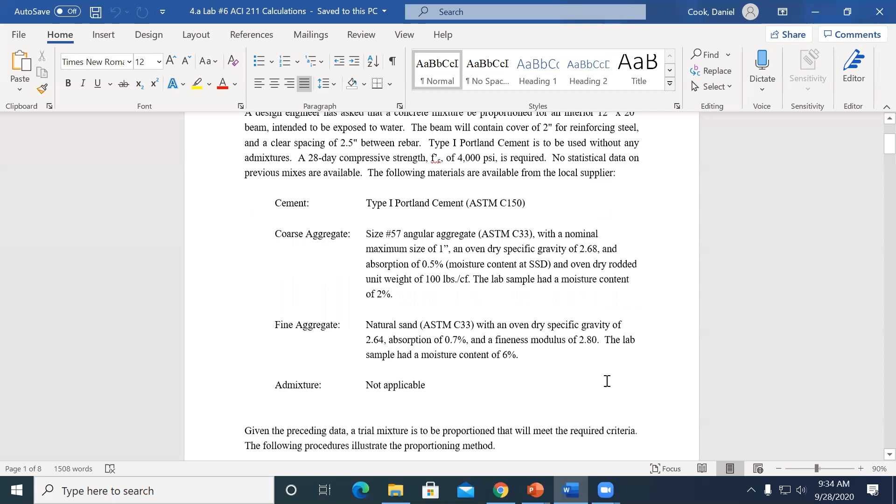Rock and sand, the numbers you got in the lab. So pretty much we're going to take our materials, put them together. I've already shown you, with the coarse aggregate and fine aggregate, we had 3 labs to go over how to figure out gradation, unit weight, specific gravity, and absorption. So now we're just kind of putting some of this stuff together and actually applying it to a mix design.

So this is what was previously in the lab manual. I think I changed up some of the words because they were very, very outdated, but I think the example's fairly relevant.

There's a 4,000 PSI mix, and they have some information about the rebar spacing, 2-inch rebar spacing for the cover. It's supposed to be an interior beam that's 12 inches by 20 inches - so that's the cross section, not the length. So 12 inches in depth by 20 inches in the actual width.

It doesn't matter necessarily how long it is for a mix design. It's just more about understanding the cover around that - if you've never seen what cover is, I'll just put it on the board real quick.

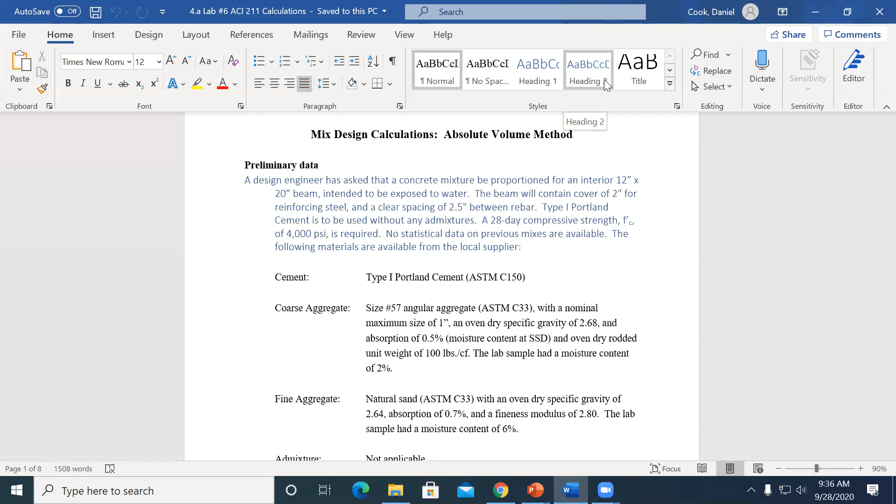Maybe I'll design this next time. But the spacing between these rebar maybe 2.5 inches, but the actual cover around is 2 inches. So that's kind of what they're trying to communicate - when you pour concrete, maybe you're pouring it straight down, your forms are around, the concrete has to get in through the rebar. So you can't have too large of a rock size for your coarse aggregate, or you're going to have problems pouring it in there.

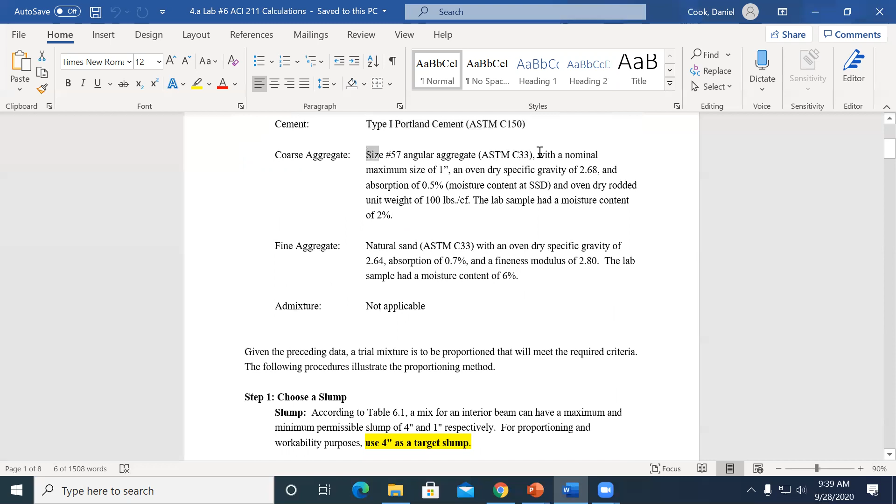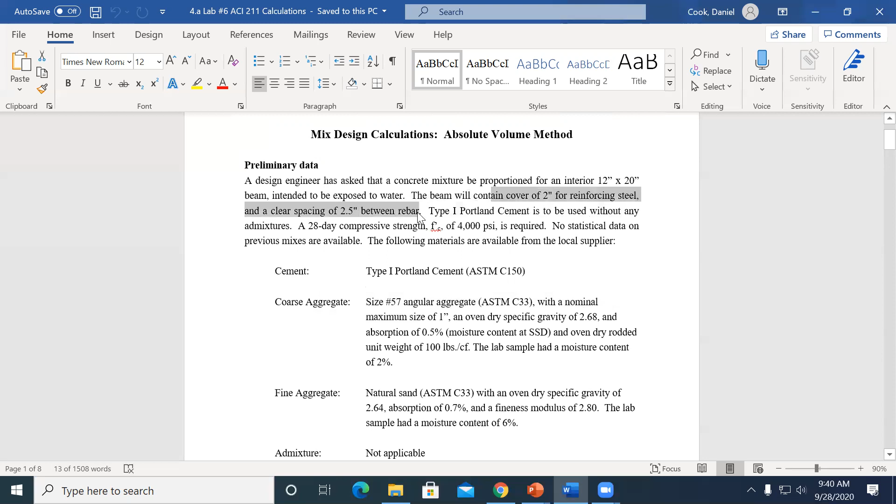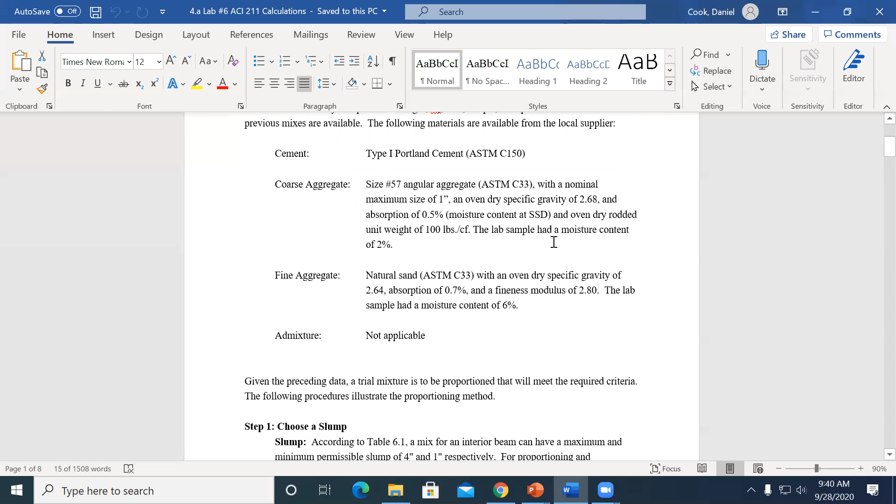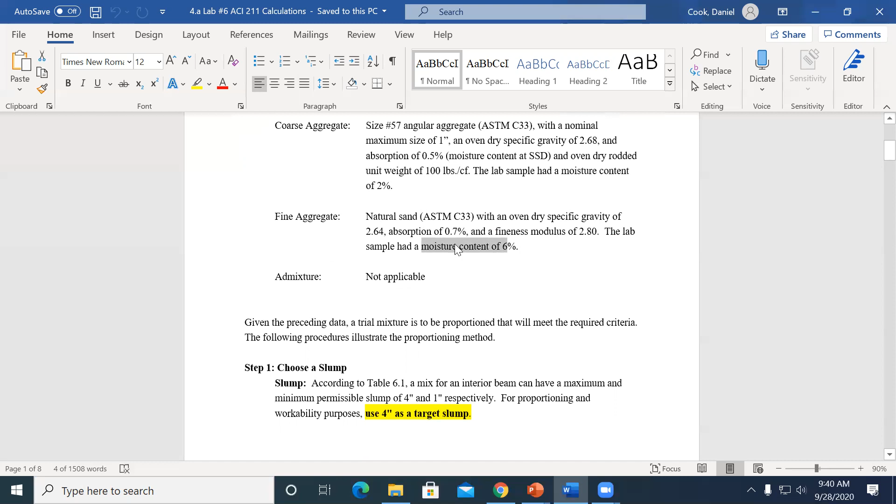We're going to use a 1-inch nominal maximum size, and we'll just check it to make sure that it fits within the cover of that steel reinforcement and that spacing. And then we have the information for our coarse aggregate and our fine aggregate - specific gravities, absorptions, the unit weight, and then how much moisture, how much water's contained. So that's for the rock, that's for the sand.

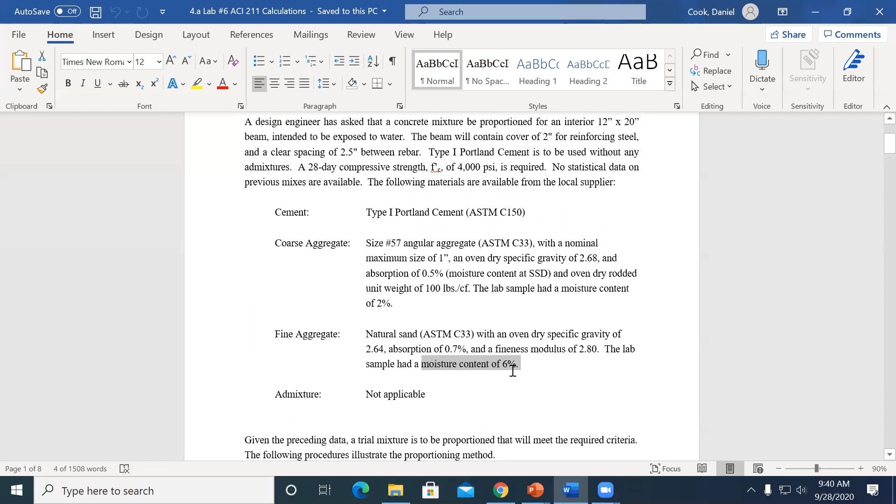Admixtures - we're not using fly ash. ACI 211 doesn't technically have that. I'm going to go through how to modify a mix design or how to incorporate those things in a mix design here - that's next lecture, I should say. So in a couple days, we'll go over how to do that part.

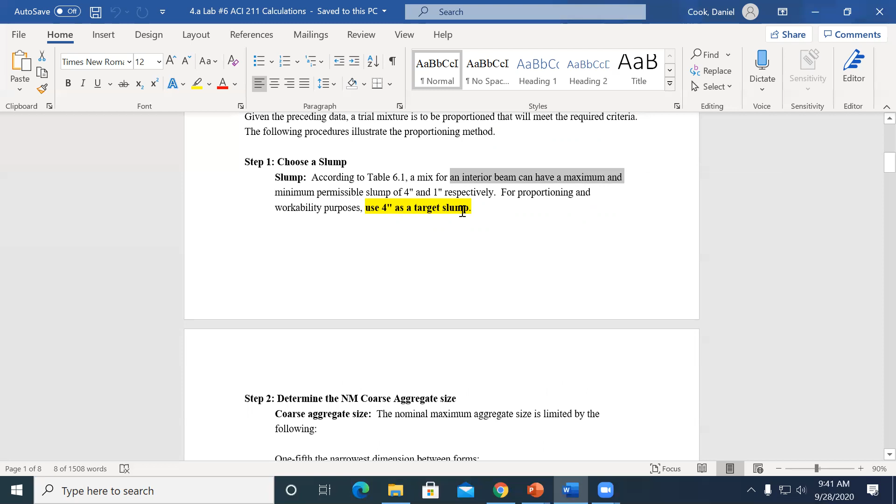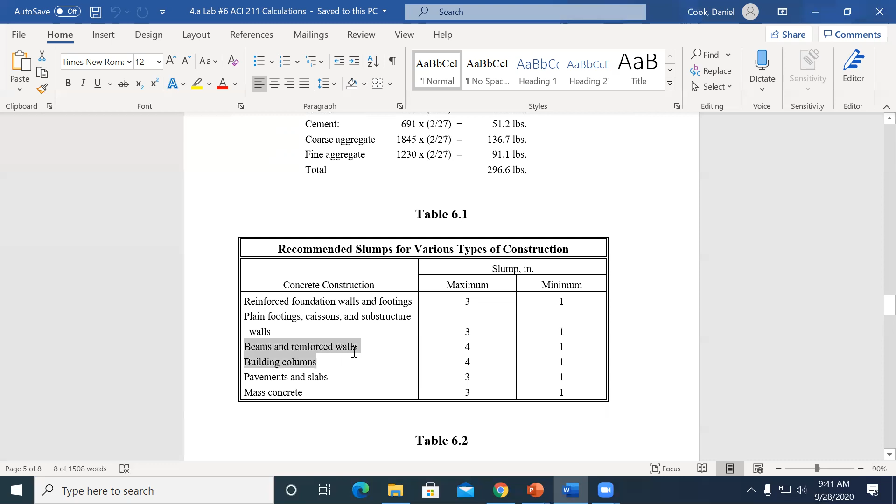So let's go through the basic steps. You're going to choose a slump. For an interior beam, they chose a 4-inch slump, and they got that from table 6.1. There's a maximum slump and a minimum slump recommended by ACI 211 - published in 1991. So you can go and look at an actual beam. I think they probably used a beam and a wall, said maximum of 4 inches.

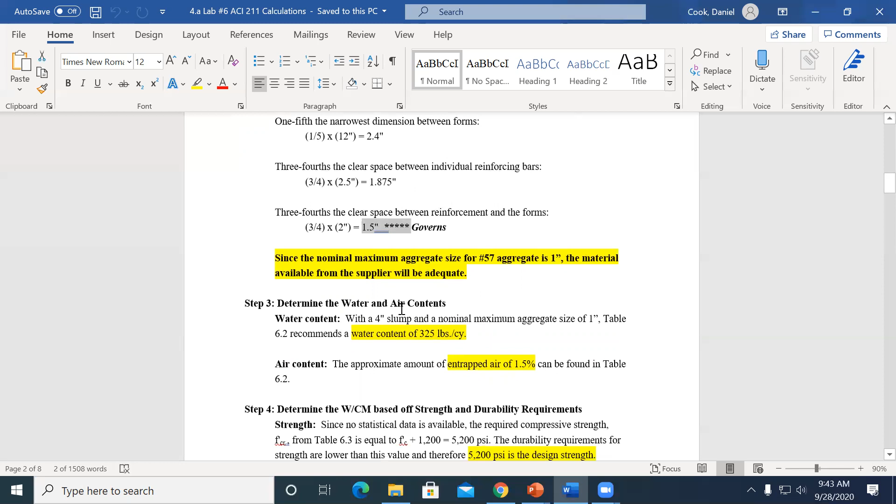So you find the smallest one out of all 3, and the 1.5 governs. Since the nominal maximum size of the aggregate for number 57 is 1 inch, that'll be just fine for what we're doing. If we're using a larger aggregate size, larger than 1.5, we'd have a problem. If it was at 1.5, we'd still be fine. So 57 or 67 stone will work just fine.

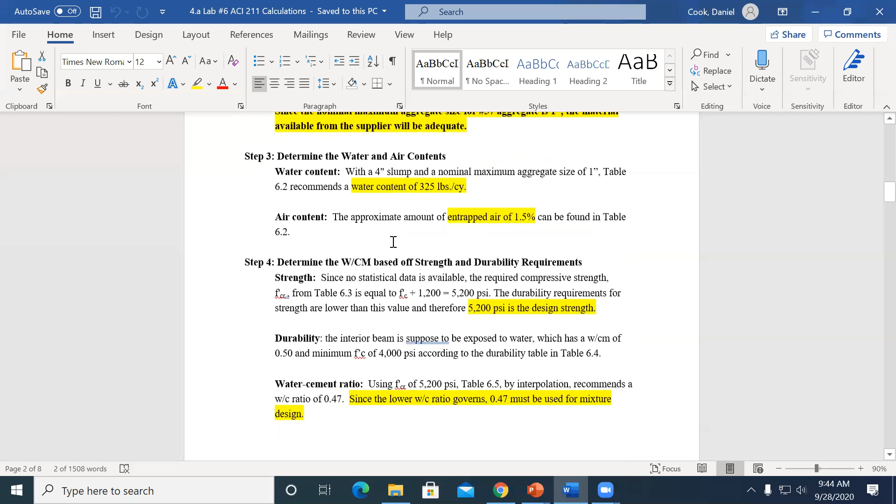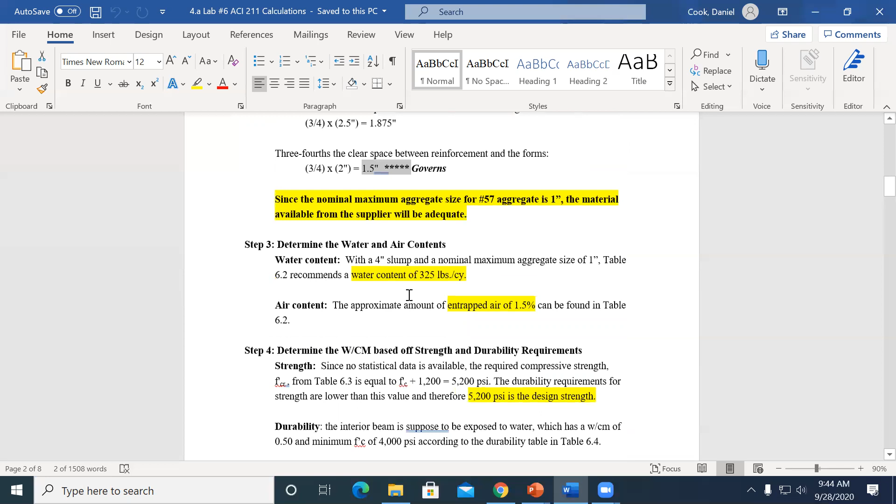Step number 3, you're going to determine the water content and air content. They don't give us air content or anything. This is for an interior beam, not exterior. Interior, you don't have to have air entrainment. Exterior, where it's exposed to freeze-thaw, you're going to have air entrainment. So they went to 6.2 to determine water and air.

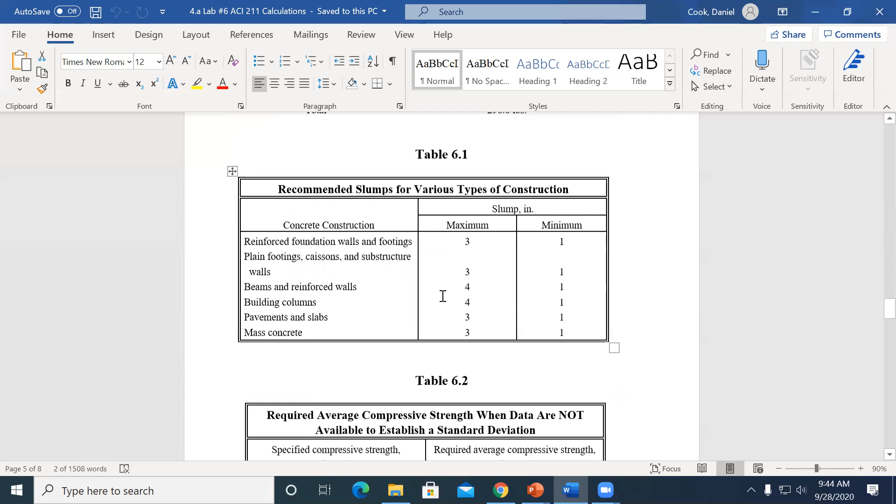So 6.2, this is for strength. There it is, so 6.4. You know, I need to move these around -- I know I moved them around once already, we need to move them around again.

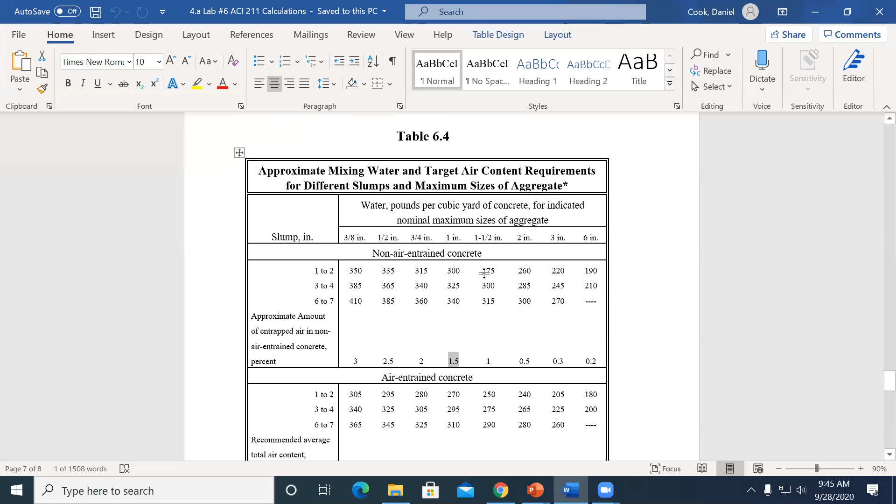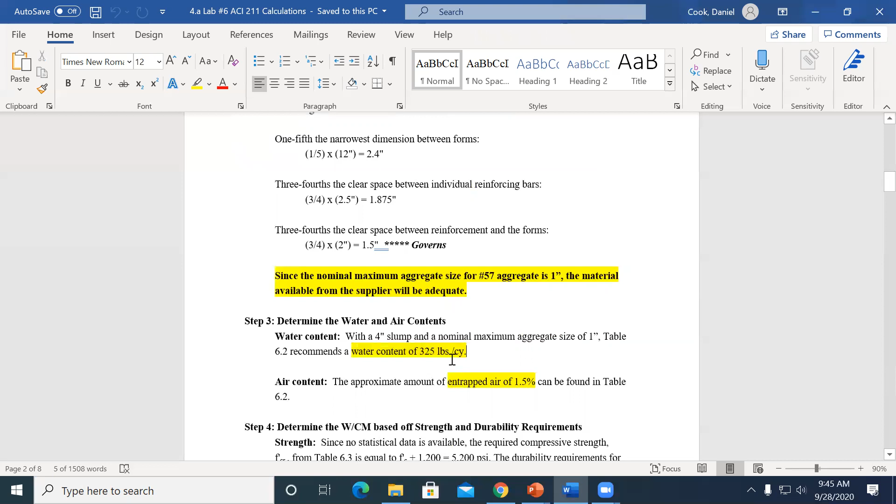So they went through and said a 4-inch slump. Here's how much water for a non-air entrained mix: 1-inch nominal maximum size, roughly a 4-inch slump, you need 325 pounds. And for air content, if it's non-air entrained, according to ACI 211 for this table, it would be 1.5% air. That's exactly what they got here: 325 pounds and 1.5 for the air.

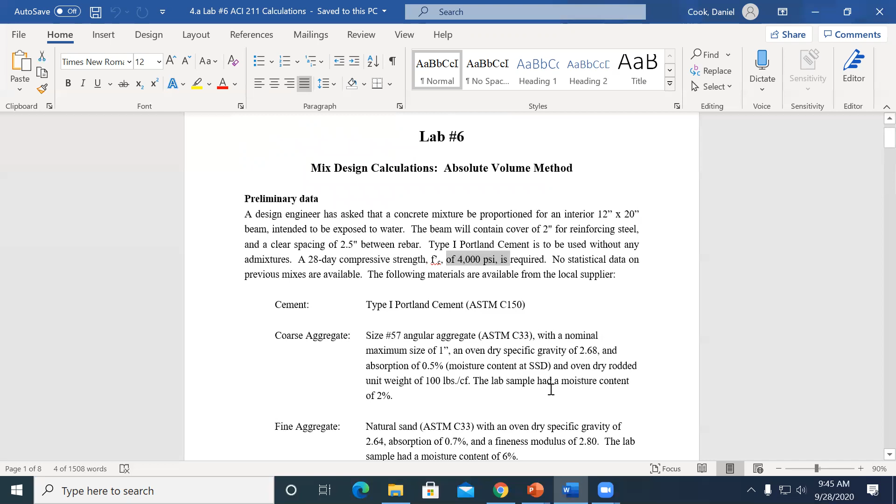So then the next step is we're going to determine the water to cement ratio based off of strength and durability. The 2 tables that were actually out of order, we're going to go through and look at them. Our initial minimum design was 4,000. So you're obviously always going to have a safety factor above 4,000 -- you don't want to target right at 4,000 because you're going to have lower strengths.

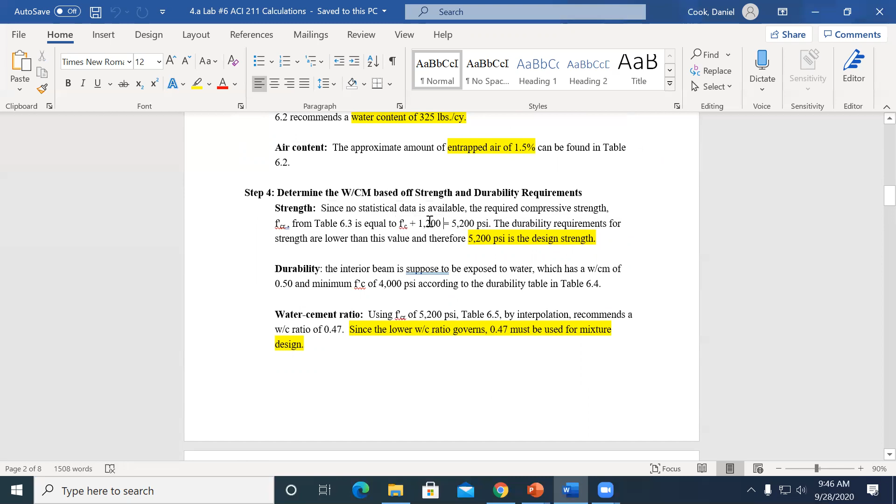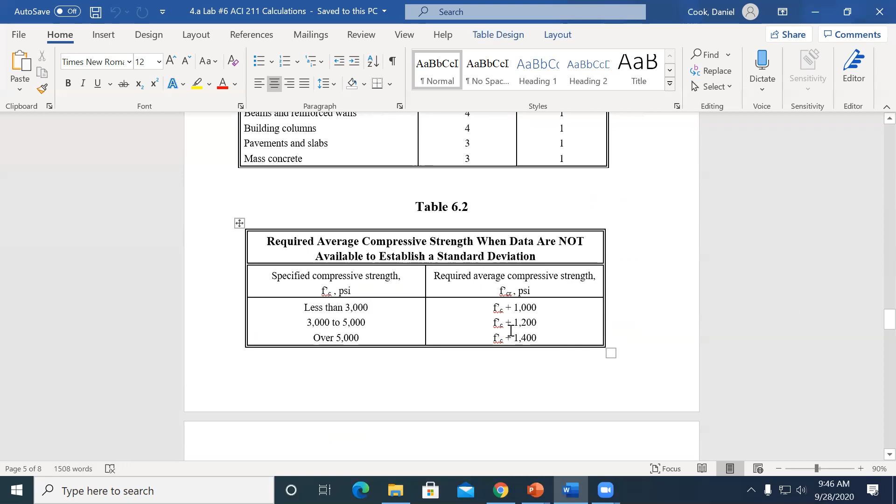There was no historical data present. If there's no historical data, you'll have to use a safety factor of 1,200 PSI. So 5,200 is what they did, and they got that from this table right here. So it's 4,000 and you don't have any history data whatsoever, you have to use this. That's how they get the 5,200.

So they get the 5,200 -- this is the exact same equation they just pulled out of the table: 4,000 plus 1,200 equals 5,200. Durability requirements -- again, it's an interior beam, but it is supposed to be exposed to some type of water.

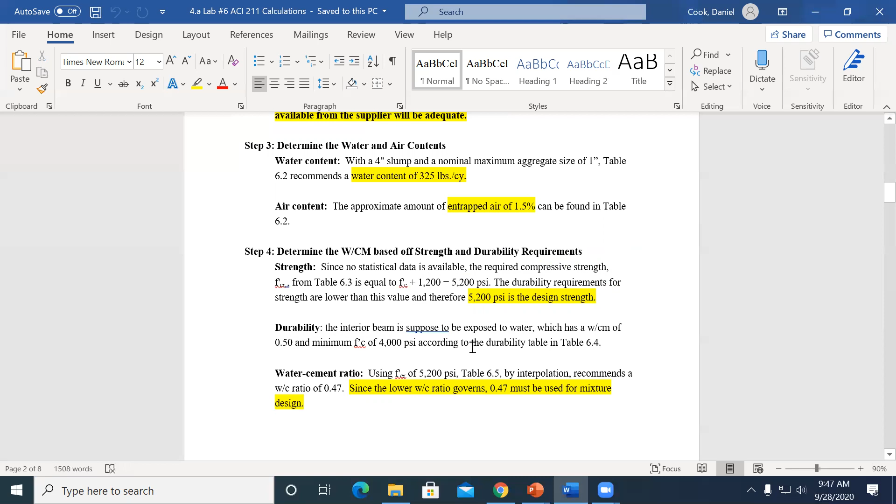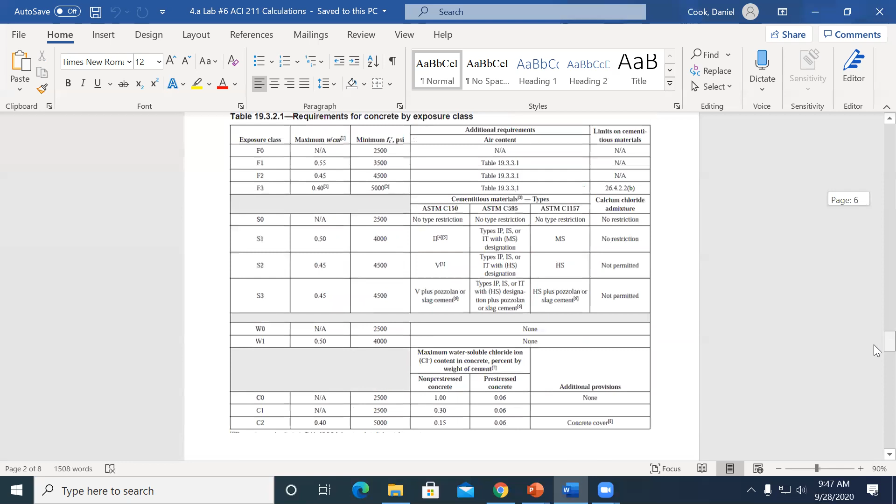I didn't actually like the table they had for the example -- it's actually a little older, but this is the table they have now, the one they were using is pretty outdated. So this is normally how you actually figure out your water cement ratio for what they were doing. So 0.5 with 4,000 PSI would be the minimum, the maximum requirement for the water cement ratio, and 4,000 for your PSI.

Since we're designing for 5,200, we'd still be fine -- we're designing well above that. The 4,000 was already required in our design, so we're great. We don't have any sulfate issues, and we don't have any freeze-thaw issues or any chlorides, so we don't have to think about those other 3 design criteria. So mainly just doing the water, because that's what the example showed.

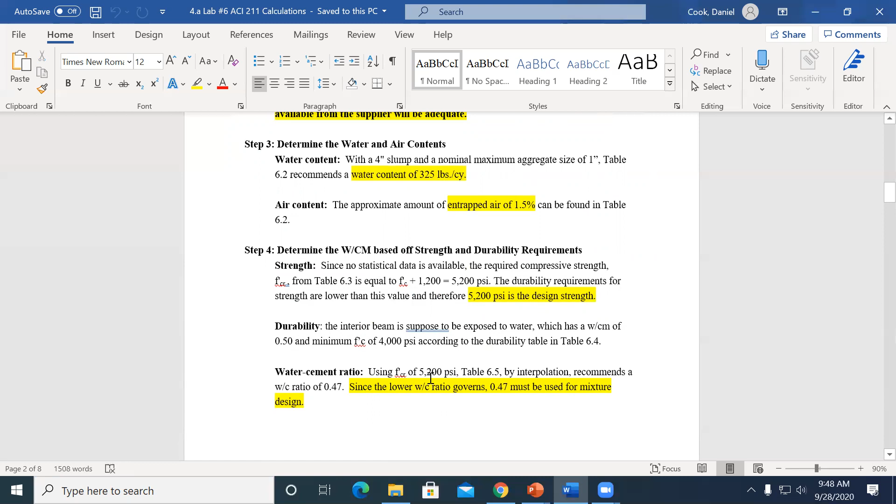So whenever they did that, whenever I did it, 0.5 is what was actually for the durability. But when you actually go in and look at the water cement ratio using f prime c of 5,200, you can interpolate to find that it actually needs to be 0.47.

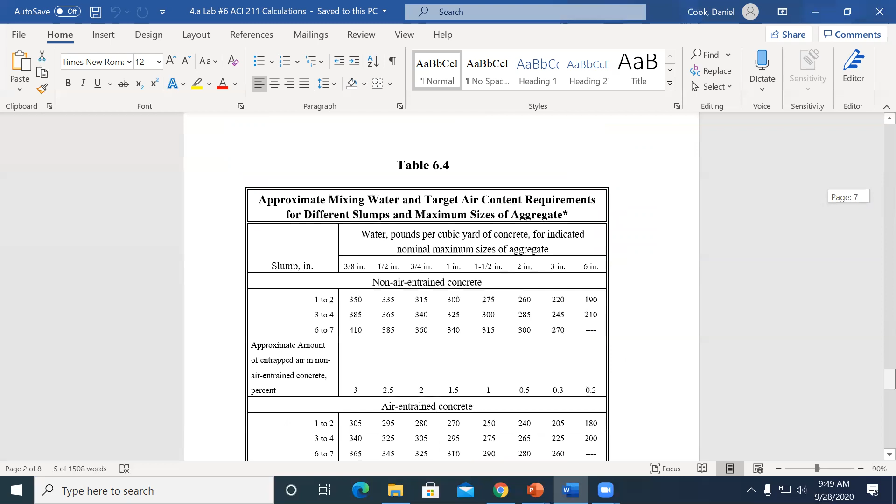So you go into your next table right here. We need to design at 5,200, so it's non-air entrained. And whenever you go in and interpolate -- does anybody know what interpolating means?

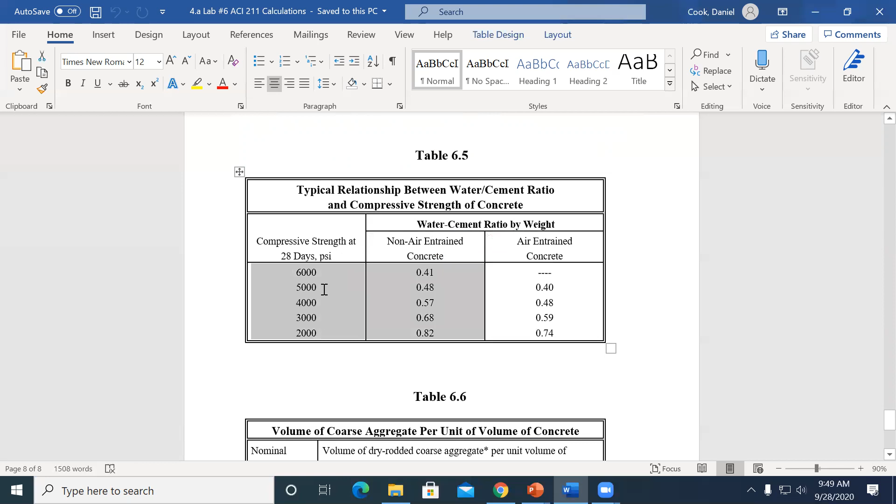You're calculating what it is in between two numbers. It's real basic math that you should know from physics, strength of materials, and a few other classes. In essence, it's interpolation, and there's a real basic equation. You can Google it if you don't know what I'm talking about. If you have problems, I'll help you Google it.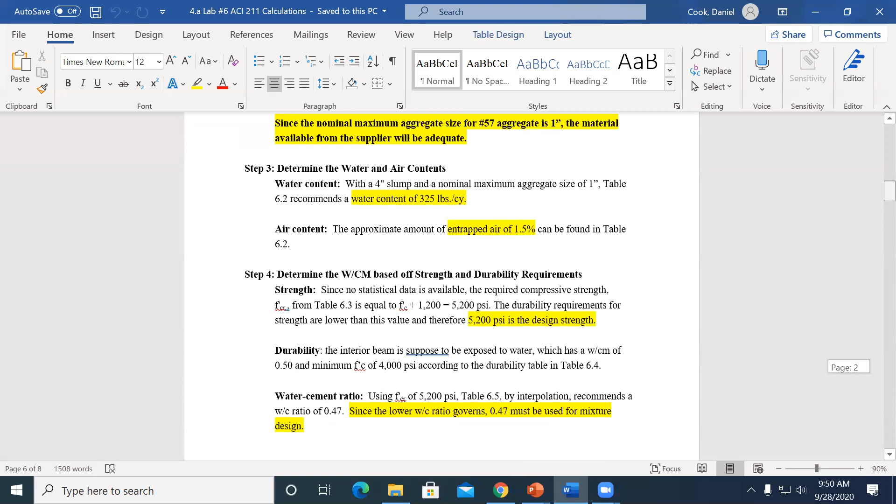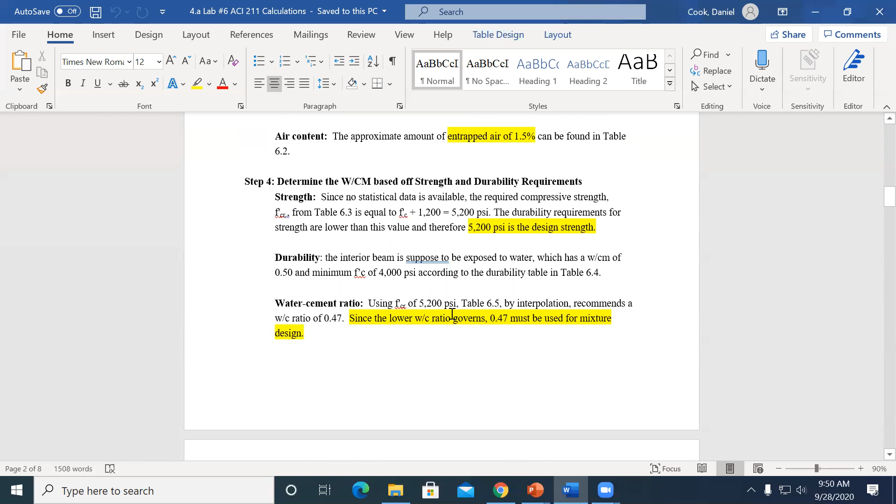So when you interpolate in between the table, they got a 0.47 water cement ratio. So that's what actually governs.

Do we have to do that on the test, or will it be given to us at the lower number? Will we have to interpolate on the test?

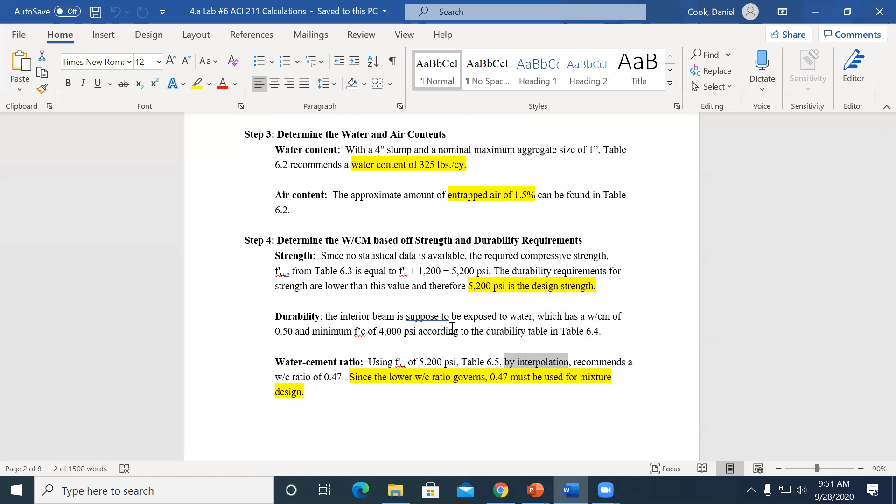You need to know how to interpolate, but that is not what I'm going to quiz you over - you still need to know how to do it. For the homeworks, you'll have to. I'm not trying to make it hard on you, but interpolation is real easy. Just learn it, because you're going to use it if you're not already. I guarantee it. Find the equation, plug it in. Some of your scientific calculators do it already - you just have to look at the function. So it's not hard, it's basic algebra.

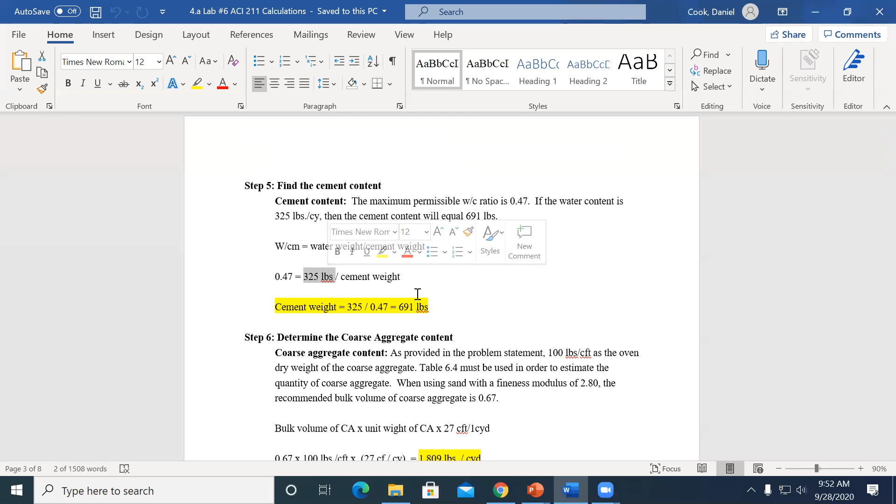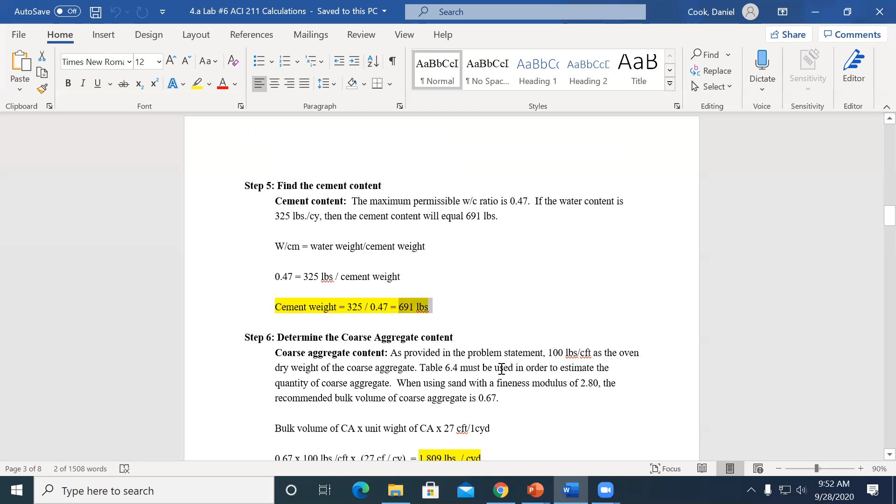So step number 5, find the cement content. We know our maximum water cement ratio from our strength is 0.47. We can go to our table, and we know the water content is 325 pounds, found in a previous step. So water cement ratio equals weight of water divided by weight of cement. Plug and chug: 0.47 was our maximum water cement ratio, and we had 325 pounds of water divided by our variable X. We move our variable up, move our 0.47 down, rearrange the equation, and come up with 691 pounds of cement.

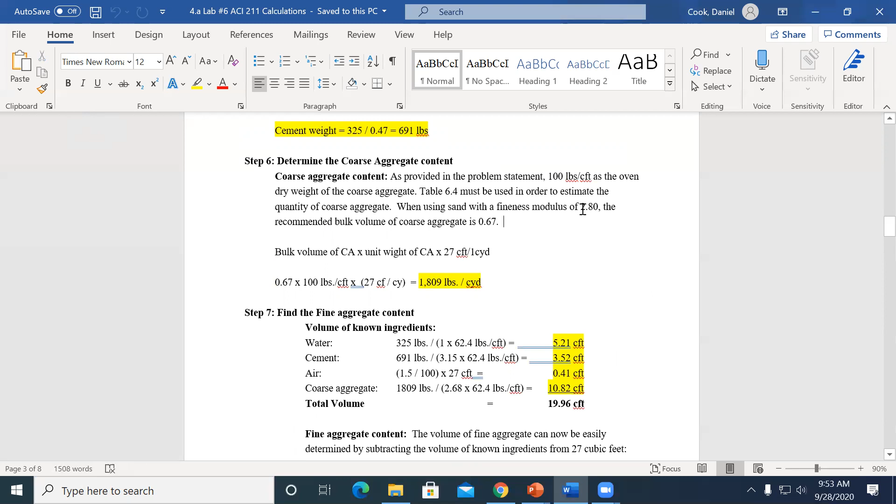Step number 6, for coarse aggregate content, we are going to use a table to figure out - if we have a fineness modulus of 2.8 for the sand. 2.8 is our FM, our fineness modulus of our sand. Going to go into this table with 2.8 and then 1 inch for nominal maximum.

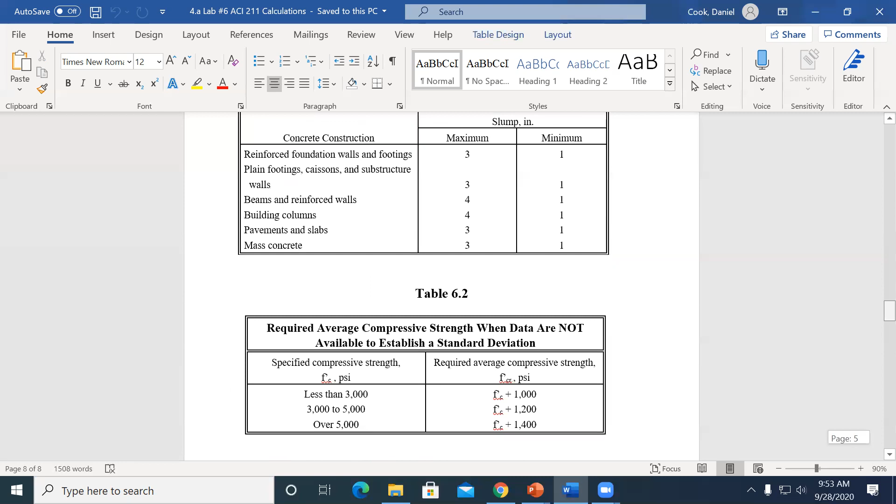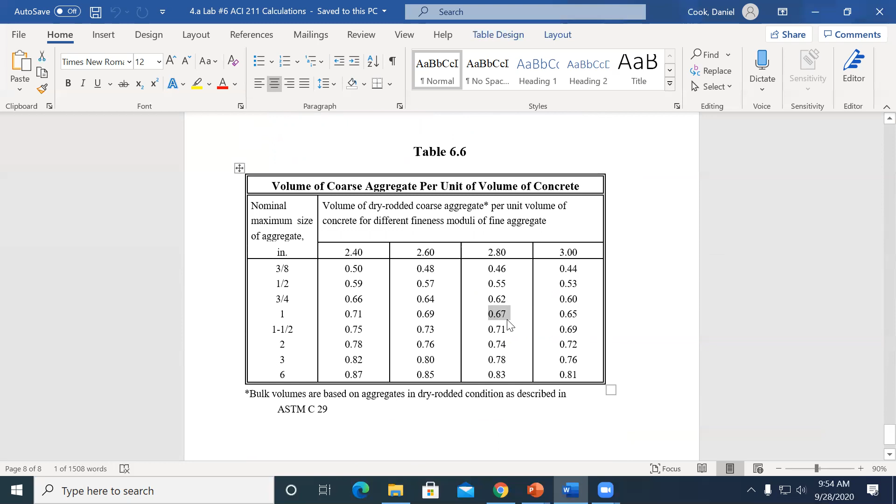Making sure I read that number right. Their answer is 0.67. So 2.8 for your fineness modulus with a 1 inch nominal maximum is 0.67.

What you do is that 0.67 - that is, 67% of the volume of the concrete is going to be coarse aggregate. That's in essence what that table correlates everything to. Whether it's right or wrong is what people argue about, but that's what ACI 211 uses, so we will use that number. So 0.67 times your dry rodded unit weight, 100 pounds per cubic foot, times 27, your conversion factor. That's 1,809 pounds - that's how they get their rock content.

Now we find the fine aggregate content. We always treat fine aggregate as the filler. We figured out everything else: our strength, our durability requirements, how much water, how much cement, how much air and coarse aggregate. We know we need to fill a 3 foot by 3 foot by 3 foot volume - 1 cubic yard, we need to fill up a box that's 1 cubic yard. So we use the fine aggregate as filler in this case, and we add up. We have everything pretty much in pounds, so we had to convert everything.

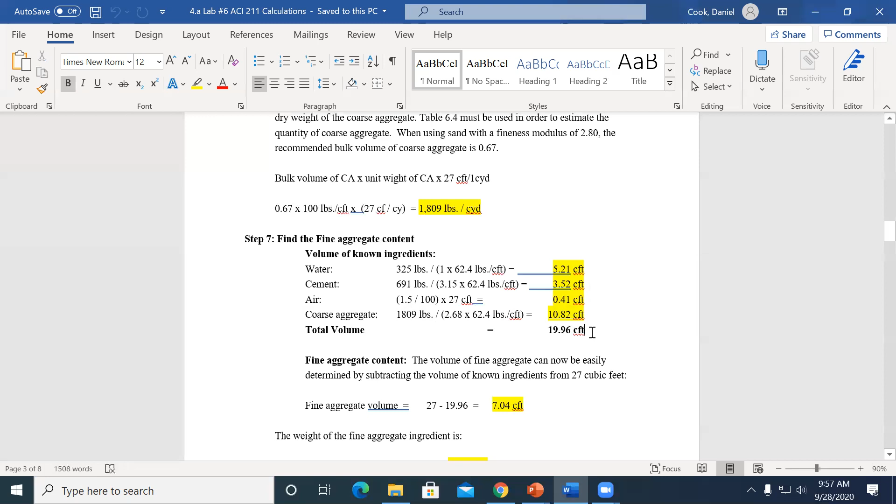So add all that up and you get 19.96 for your volume, everything but your sand. So like I said, sand's a filler, so you do 27 cubic feet minus all the other materials that were in that volume. So you subtract it: 27 minus 19.96, so 7.04 cubic feet.

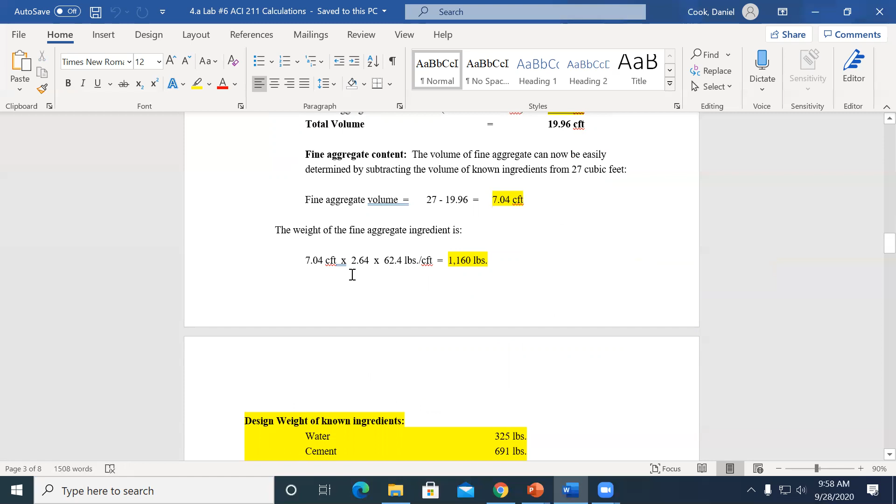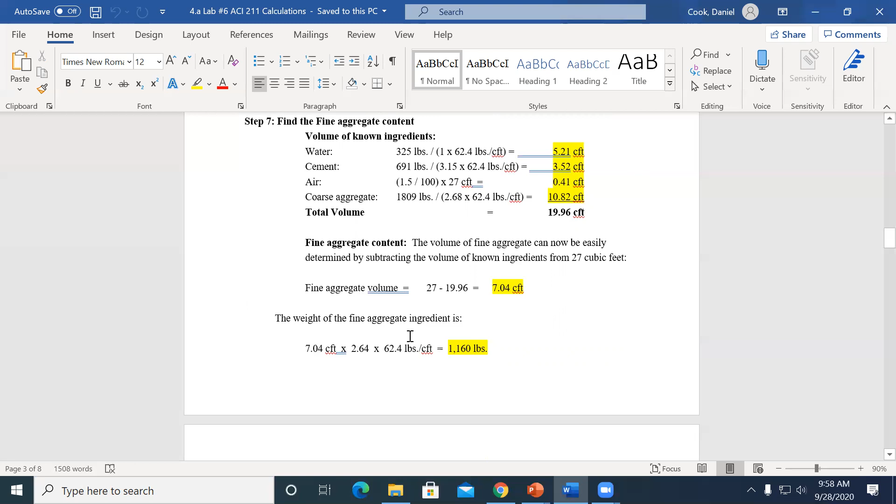Then to figure out the weight of your sand, like you did the rest, instead of converting from weight to volume, you're converting from volume to weight - same equation, but flipped. So take that 7.04 times the specific gravity, in this case 2.64, times 62.4. So 1,160 pounds. This is the basic weight that we get from everything.

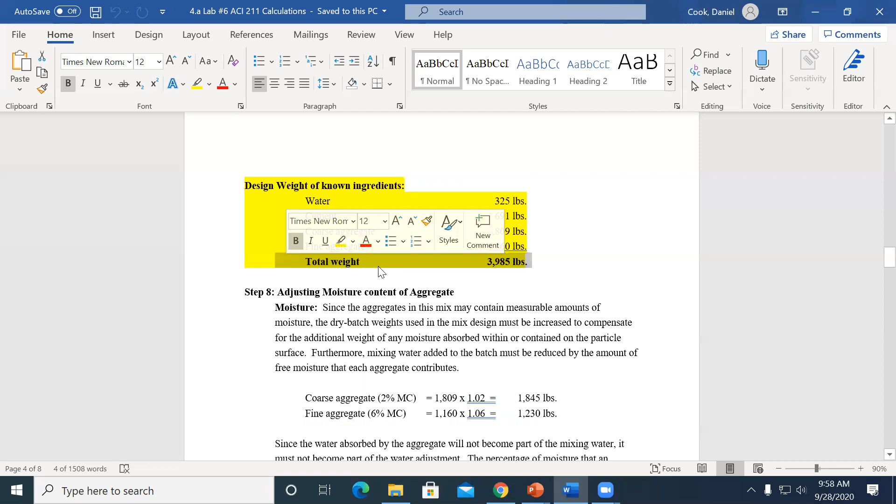So usually the total weight of concrete is going to be around 4,000 plus or minus roughly 200 pounds normally. Your coarse aggregate content, usually it's somewhere between 1,600 and 2,200. Your fine aggregate content is usually somewhere between 1,000 and 1,400. But again, these are just general numbers.

If you go up into the Kansas City area, if you go into Kansas, there's places where the sand's really coarse, and so those numbers may actually be more flipped. So they have a lot more BBs in their sand, and they have really small rock.

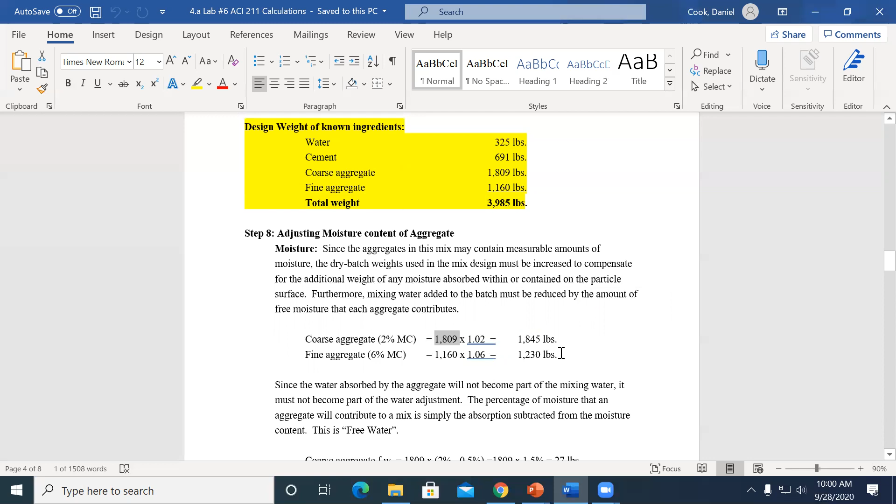But anyways, when we talk about step 8, adjusting the moisture content of the aggregate, what you can do is go in and do 1,800. So the moisture content, say there's free water of 2, then you times it by 2, it's 2%, so 1.02, 1.06, to get your batch weight, or to get your changes in your water.

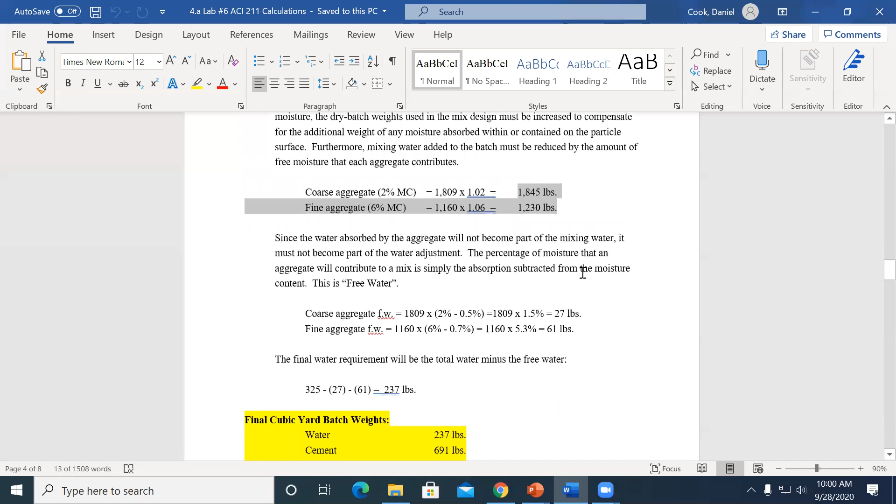And then so that's your basic water. Since the water absorbed by the aggregate will not become part of the mixing water, it must not be included in this adjustment.

So instead of doing this, you can actually figure out - you do the 1,800 times 2 minus 0.5. So the 0.5% is your absorption of the coarse, and the 0.7% is your absorption of the fine. If you remember, the absorption of aggregate is at SSD - how much water actually gets retained into your rock or your sand, the pores, but doesn't have any free water around it. That's what your absorption value is, the 0.5 or 0.7.

So what they're doing is trying to figure out the free water right here. So free water, the 2 minus 0.5 is 1.5% of free water, and it's the same thing with the 6 minus 0.7, which is 5.3. So that's how much free water you're given.

So they're saying, well, how much free water do you have? So they do the multiplication there on both of them to give you 27 pounds and 61 pounds - that's how much free water is in there. So you can actually take your total water and minus both of these numbers to get the actual water that you want to batch.

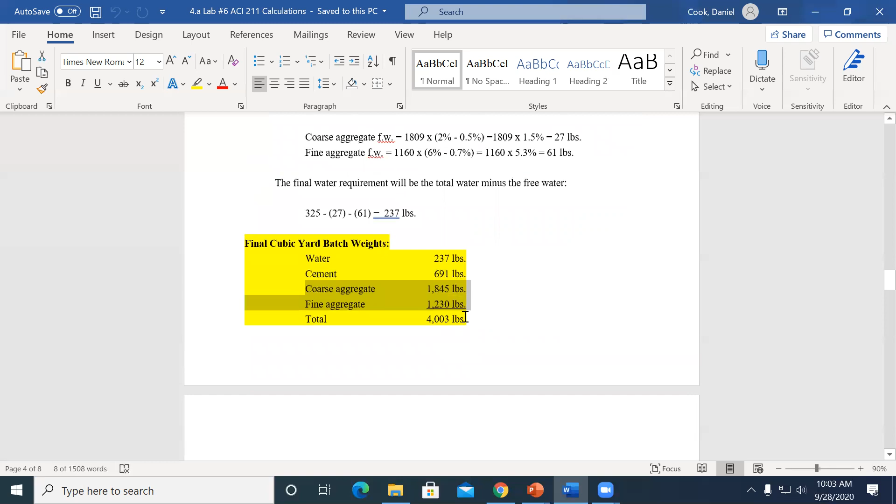So when you go to batch per cubic yard, you'll go in and do 237 pounds of water. Your cement didn't change, and then your coarse aggregate and fine aggregate is right there - so they did change. So whenever you do a moisture correction, step number 8, adjusting moisture content, it's only for your water and your aggregate.

Okay, so your air content's not going to change. Your cement, your fly ash, your admixtures aren't necessarily going to change.

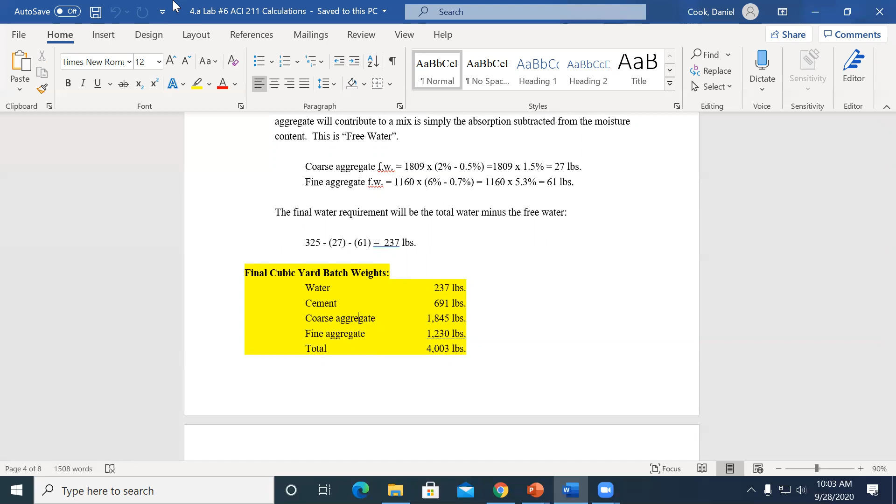So step number 9, trial batch and test the actual mixture design. When you trial batch, you want to make it lower. So if we want to design for a 2 cubic foot mix, then we need to convert all these - this is per yard - so we need to convert everything into 2 cubic feet. So 2 divided by 27, so 2 cubic feet over 27 cubic feet.

That's how much you need for 2 cubic feet for water, cement, coarse aggregate, and fine aggregate. So you batch all that out. We'll have scales tomorrow, and you'll go in and actually batch out all those different materials.

Per cubic foot or 2 cubic foot mix, and then you'll test it. So that's what we'll do tomorrow. So when you do your batch weights, that's where they're at, so you have an accurate number.

In the past, when we made concrete using the 1, 2, 3 method, you can go back and calculate how much volume that is, but it's not exactly super accurate. It's hard to hit a target of 1 cubic foot unless you do all the basic math, as opposed to doing a shovelful of each, which isn't as accurate.

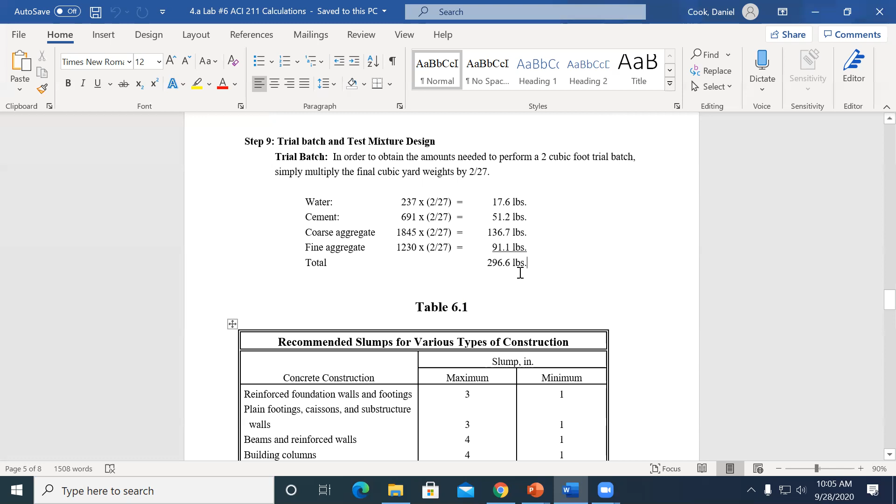So this is a little bit more of an accurate system. And then we'll just test, we'll do our testing. So these are all the different tables, and I will give this to you.

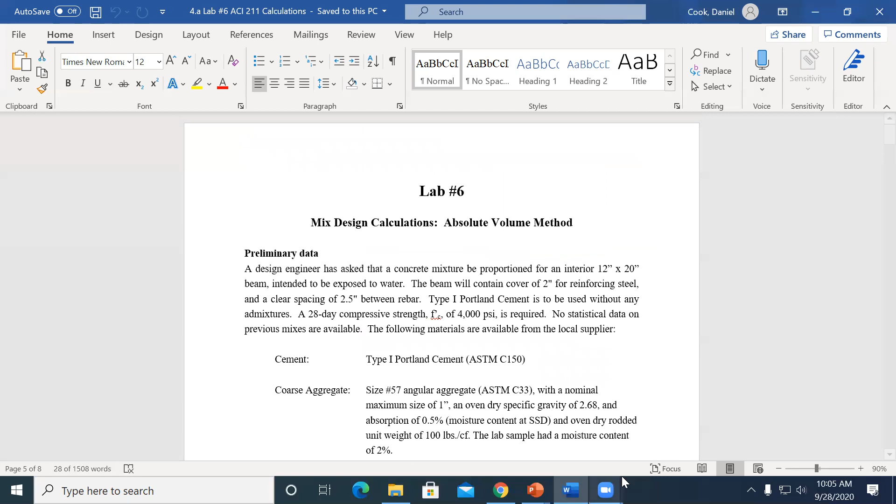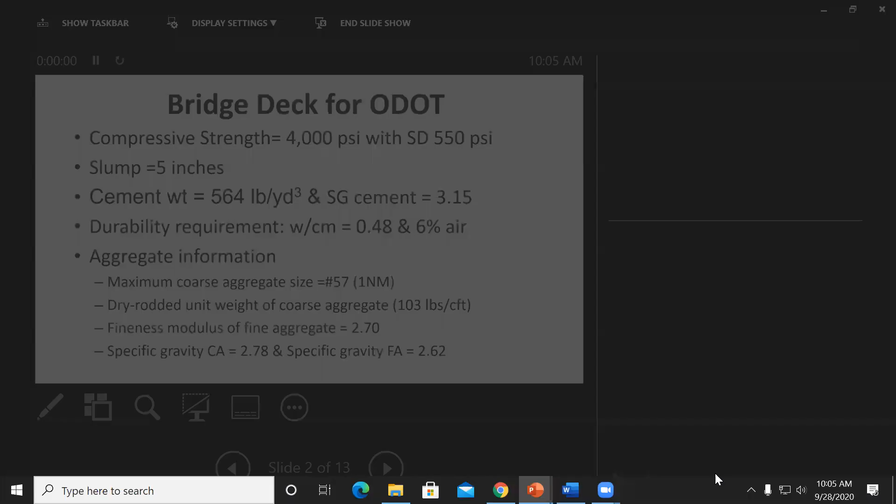So I may have a compressive strength of 4,000 PSI, and maybe I already have some data with a standard deviation of 550 PSI. And then we want a slump of 5 inches. This is the minimum cement we have. I'm not going to do fly ash today, that's the only thing different. Specific gravity 3.15, and then we have a water cement ratio that's given, and then 6% air.

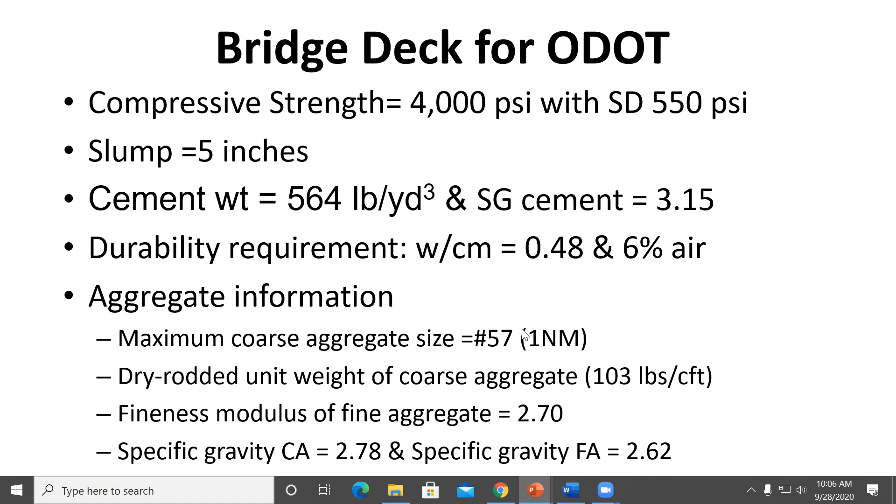And then these are some of the basic properties, so we're going to use a 1-inch nominal maximum size aggregate again. The basic steps, we just walked over every single basic step in ACI 211 through our lab. Some of this stuff, when they give you the cement content or the water cement ratio, you don't actually have to go back, you just have to check durability, and in our case we may be just fine.

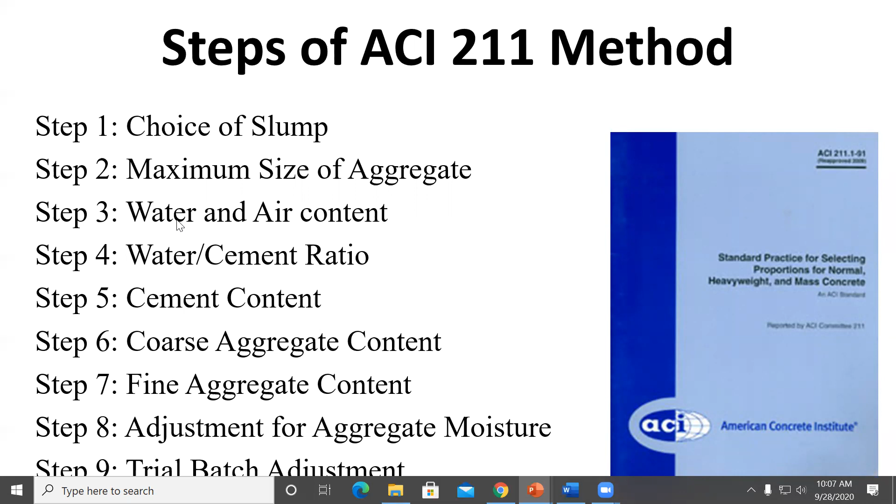And then our water content and our air, they already give us our air and our water, and we can just calculate water from that. So a good first step is you should go through and figure out how much your actually required design is. So if it's 4,000 PSI and say there's 20 tests, and we have a standard deviation of 550 PSI, we're going to go to this table.

It's 1.08, so the corrected standard deviation is 1.08 times 550, so 594. And then we'll take these two equations, since 4,000 is less than this, we'll go through and figure out our safety factor now. We plug 594 through both of these equations, and we find out 4,884 PSI is the one that governs, so you always pick the highest.

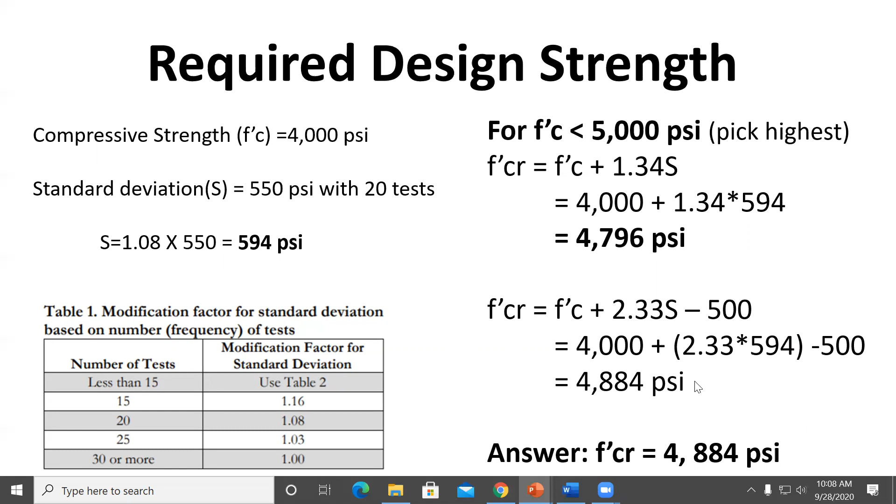And then we already had a 5-inch slump that was required, so we don't have to use this table. We do need to check to make sure our coarse aggregate size dimensions look good, so I went through and found the smallest one's this, so 1-inch nominal maximum size won't be a problem.

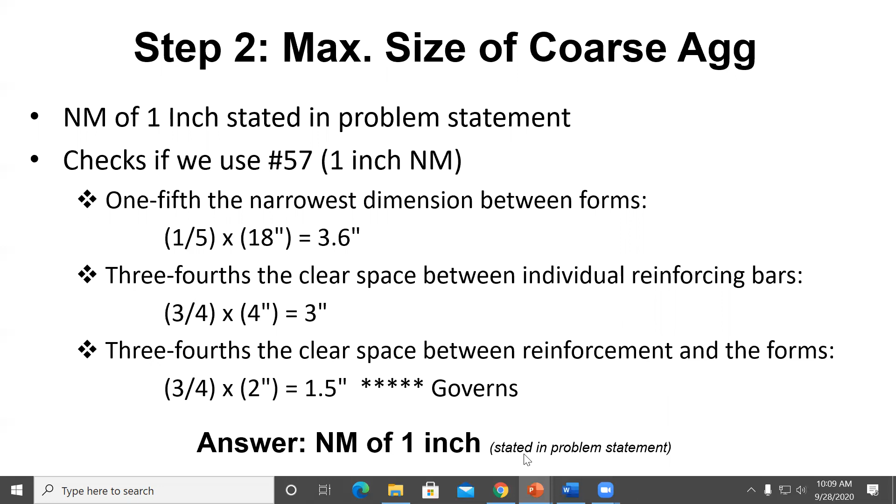So steps 3, 4, and 5 talk about how to get your cement weight, your water weight, and your water cement ratio. And for our durability requirements for the state of Oklahoma, they say 0.48 is just fine.

We can go through and do a check to figure out if this is fine or not. But when you go through, just to make sure for strength that you have a low enough water cement ratio, you find that you do. So we're just going to go with that same water cement ratio, we won't go through the actual table, we'll just go through and make sure we're good.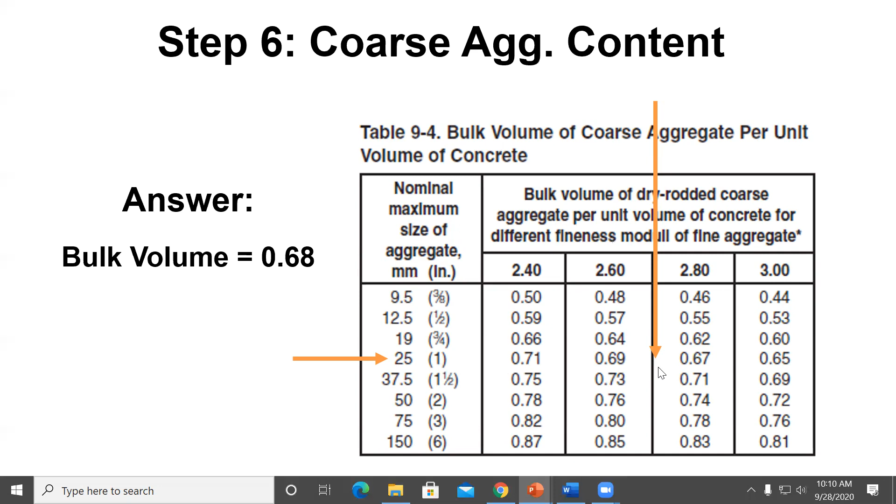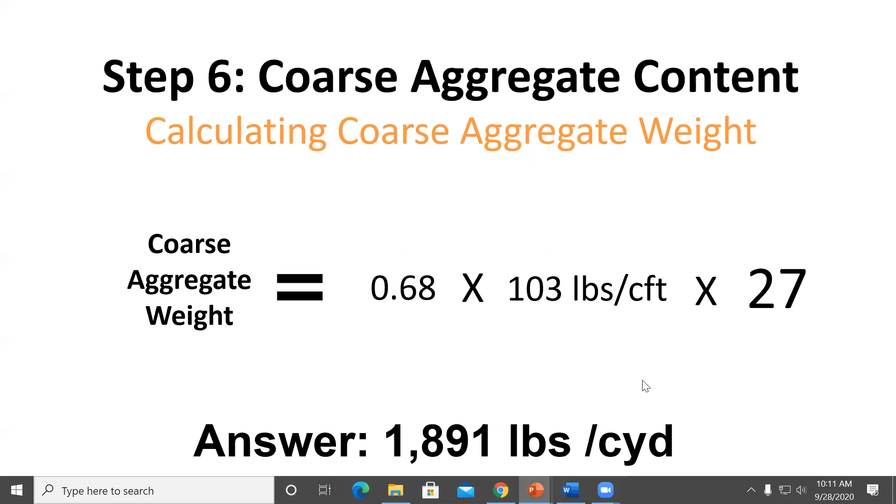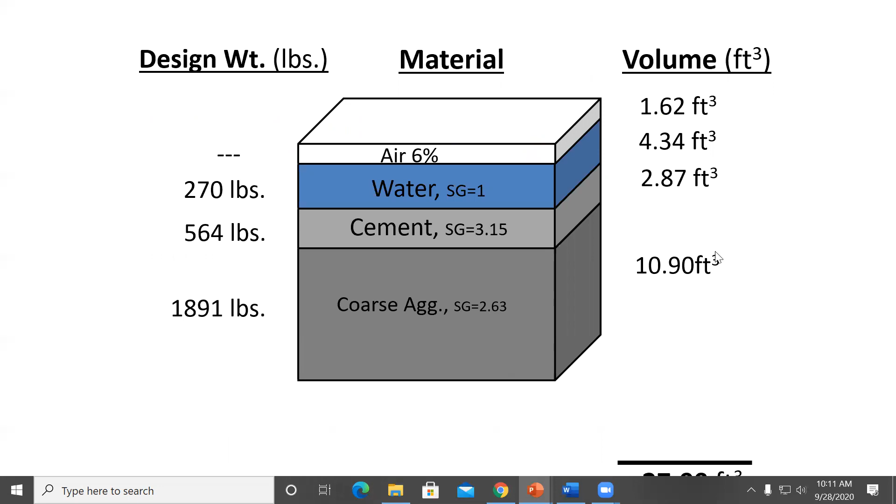So that 0.68 number times your unit weight of your coarse aggregate, which was given in the example, times your conversion factor of 27, gives you 1,891 pounds. So 1,891 pounds, we can divide that by 2.63 times 62.4 to come up with that 10.9.

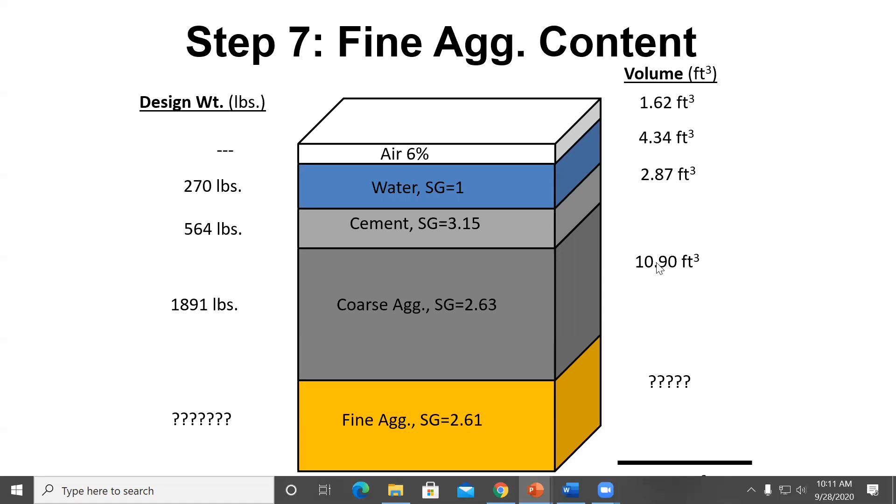How do we do fine aggregate? Remember, that's the filler. So we add up this column here, and we figure out, minus 27. When we do that, it comes out to be 7.27, and then we times that by 2.61 times our unit weight to get to our 1189.

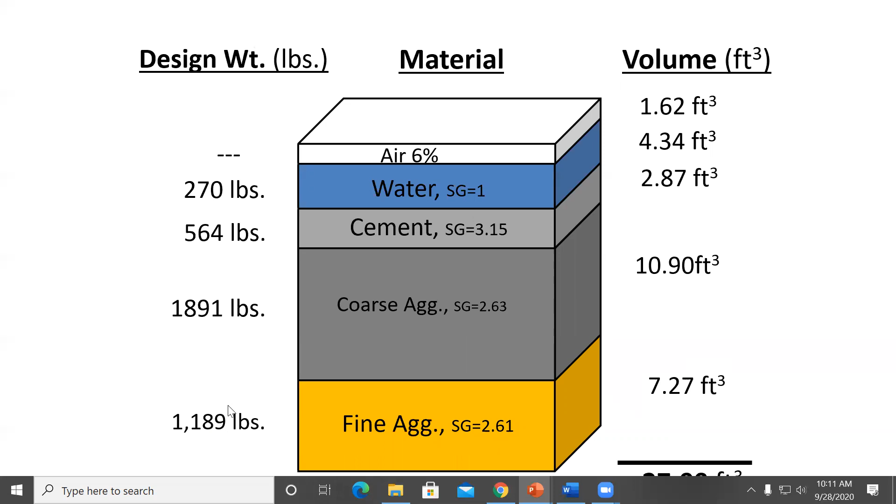Sometimes specifications can kind of simplify some of the stuff we're doing in mix designs, but as you plug and chug through some of this homework, it'll be easier. I want to be clear, our homework 2 isn't necessarily going through every step of ACI 211. We're going to have another homework assignment coming out that goes over that. So I wanted to split these up so you had two different ones - the first one was more theory, the second one's more actual plugging, chugging, and doing a lot more of the math.

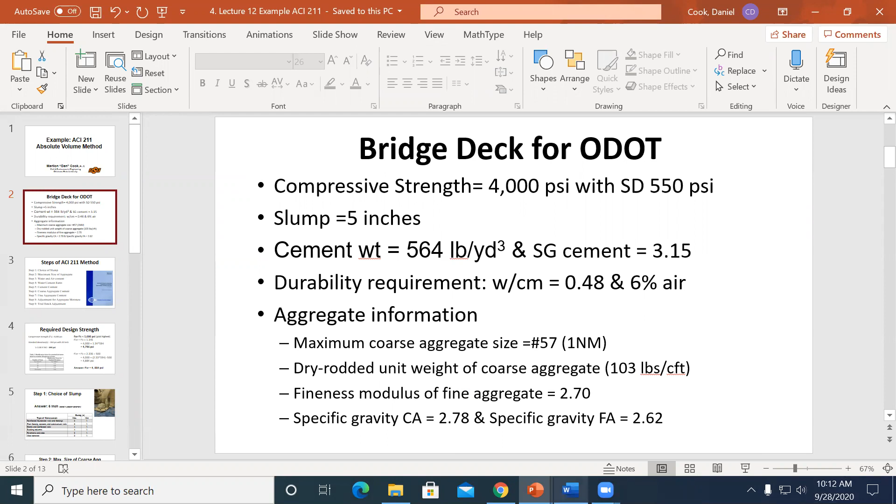I have a question about adjusting to the moisture. We went over that. Are those percentages given, or is there a way to find those percentages when we're subtracting them out? So we have our moisture that's given, and we have our absorption that's given - you had the 0.5 and the... Yep, so for our coarse aggregate, we had absorption of 0.5, and our actual moisture that we measured was 2% for coarse aggregate.

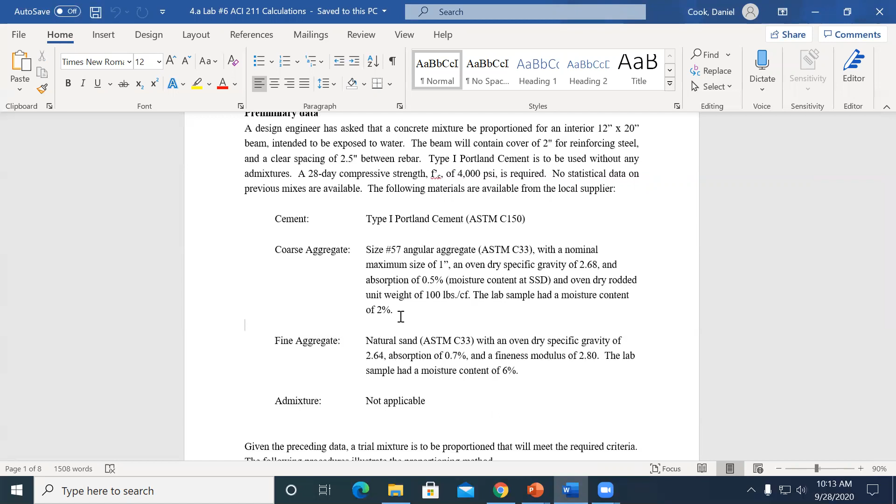If you remember in our first three labs, we went over aggregate stuff. Whenever you go and take a sample of coarse aggregate and put it in the oven, and weigh it before and after, that's the actual moisture content. And your absorption is if I take an aggregate and put it in water for 24 hours, come back and dry it out - if it's coarse or fine aggregate, I take a blow dryer and dry it out, just to make sure it's dry on the outside but the water's still on the inside - that's how you get those numbers.

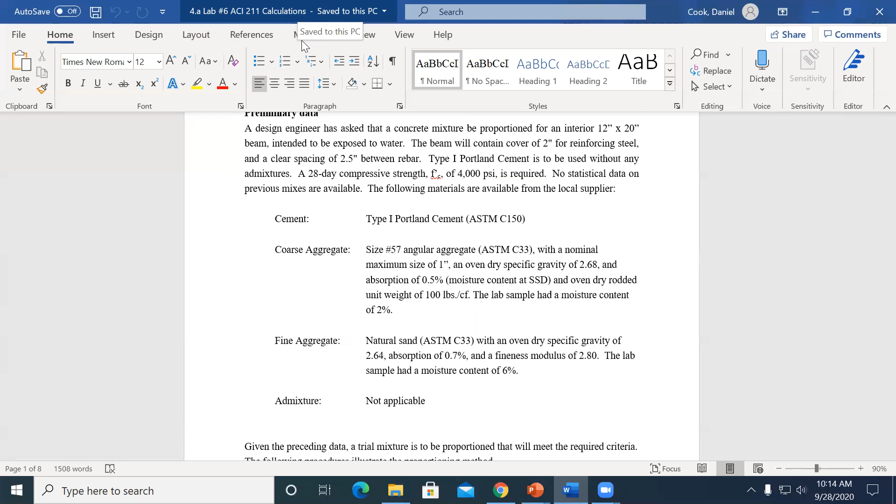So you did the 6 minus 0.7 and 2 minus 0.5 in the math? Yeah, for the water. Yep. So that's kind of how they do that.

Yeah, and a lot of this, you do some math to make sure, you have to run through the math and take your pencil and crank it through, and that's what some of the homework will be - doing some of that in a way where I can still have it online, because that's what they don't want, paper. So a little different, but I was just wondering where you got the numbers from. I saw so many slides, I forget what the specific statement was.

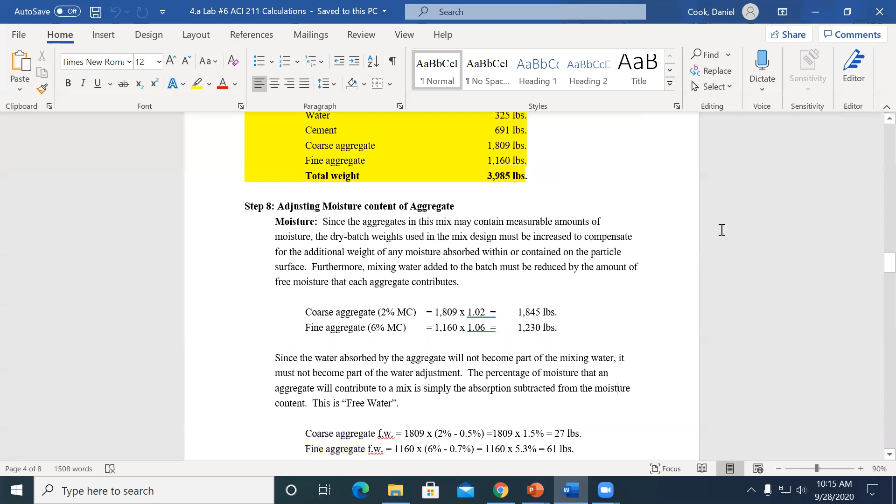Yeah, so this part here, this is what they do to say how much do you need to batch to get both your rock, to get your adjusted rock. Oh okay, so because you have 1809, that's supposed to be when it's completely dry - that's what they're supposed to design at for ACI 211.

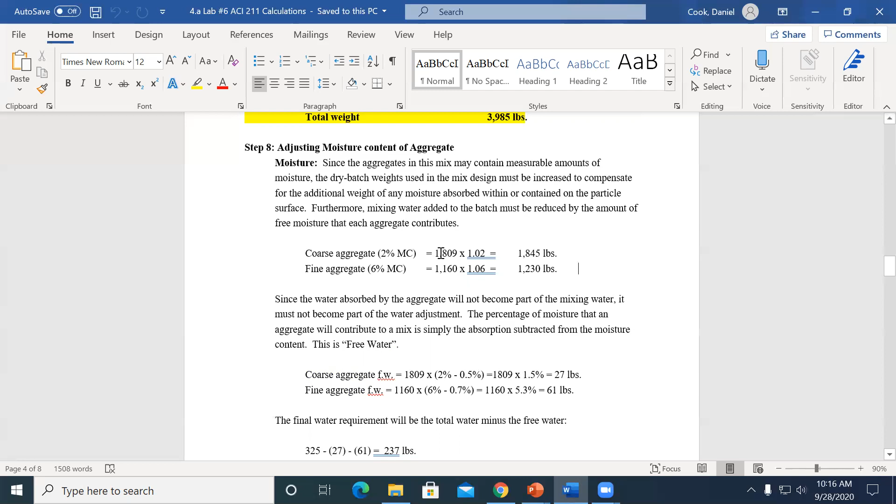It's actually, well, we'll just do that - technically it's supposed to be at SSD. So you're factoring the water content. Yeah, so whenever you go in to do your batch, you don't batch 1,809 pounds of dry aggregate, you're going to batch the 2% to adjust for your moisture content.

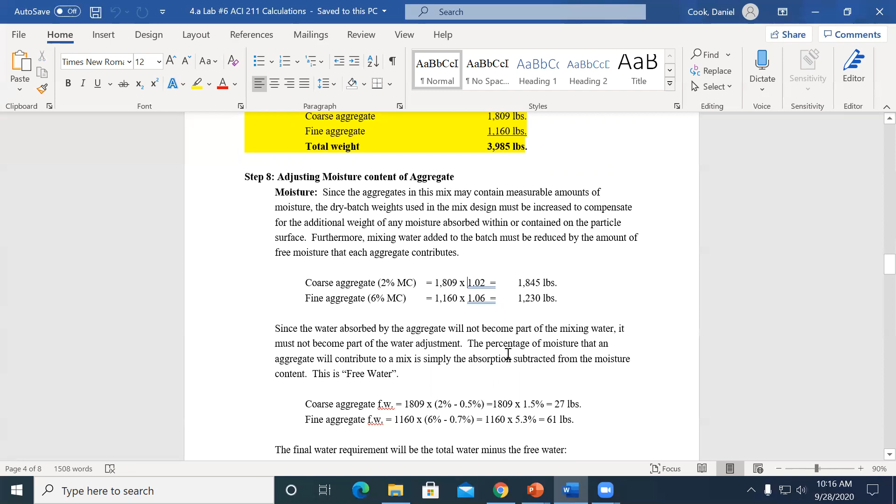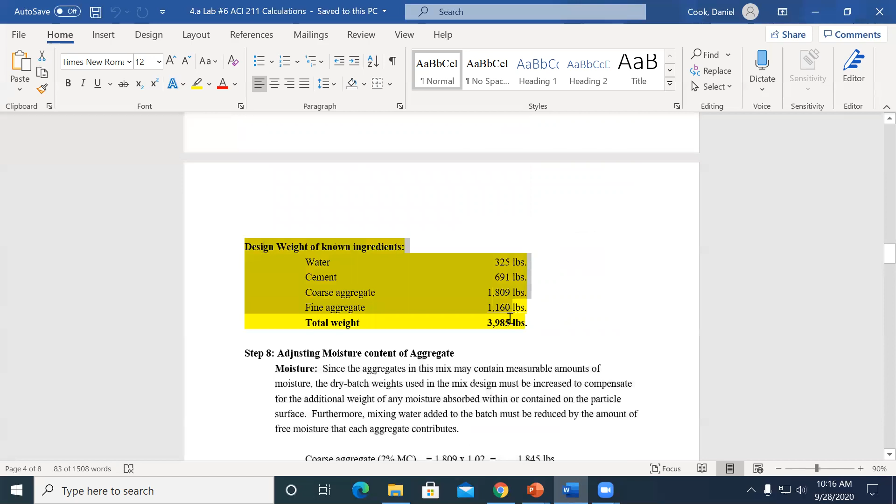But you didn't take that out to find how much actual - and this is how to figure out the water content. So this part is, this is how much do I need to batch? I designed it, but whenever you go and hand your design to a batch operator, how do I batch the concrete? So this is, okay, your absorptions are this, so this is where you need to be at to batch the concrete. That's kind of how they do that.